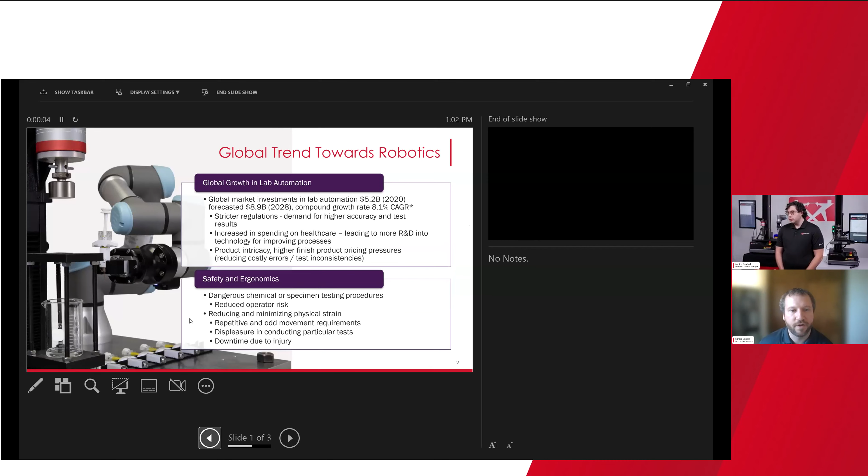Hi, thanks, Nick. There we go. All right, I'm going to start with more high level, just trends in automation. Oh, you'll just want to switch your slides. In there, thank you.

Perfect. All right, so automation in bio. So there's been a lot of global trends towards adding robotics into a lot of different industries, everything from manufacturing to testing. There's specifically been a lot of growth recently in lab automation. So automating the quality control, R&D testing that's needed to be done. Robots have worked their way out of traditional manufacturing environments and into the next stops along the way in the process for product development.

Global market investments in lab automation was $5.2 billion in 2020 and forecasted to grow up to almost $9 billion in 2028. So that's a CAGR of just over 8%. And what's driving this huge growth? 8% a year is a lot. Stricter regulations requiring a higher demand for higher accuracy and more test results.

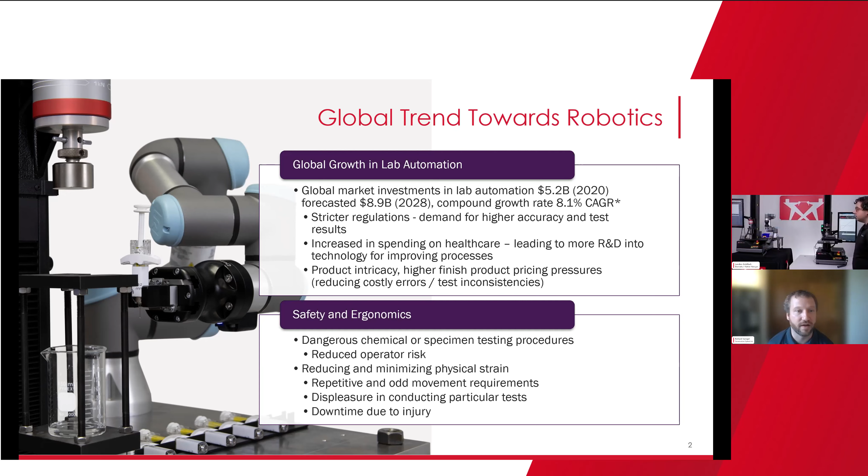Specifically in bio, I'm sure everyone's noticed, there's been an increase in spending on healthcare, leading to more R&D into technology for improving the processes. And companies are needing to increase the amount of testing they're doing, ideally without adding more personnel. So the product intricacies that are being developed now are having higher driving price pressures to drive prices down. And to do that, you got to lower the amount of money needed for testing. Safety and ergonomics. The safety requirements are constantly growing.

I know when I started in industry about 10 years ago, we used to be able to go and get a Band-Aid if we had a scratch or something. And that was that. You just needed to go get a Band-Aid. If I were to get a Band-Aid today, that's now an OSHA recordable. It's kind of the same injury, but the requirements are changing. So with that, trying to automate increases the safety by removing the risk from the operator. So dangerous chemicals or specimen testing procedures, reducing and minimizing physical strain.

Some lab equipment is not really designed around the ergonomics of the operator. It can be difficult to load in and unload, as well as just the repetition of the amount of testing needing to be done can lead to strain injuries. As well as there's just a general displeasure by some operators in some tests. Some are cumbersome or not fun to do, to sit in front of the test frame.

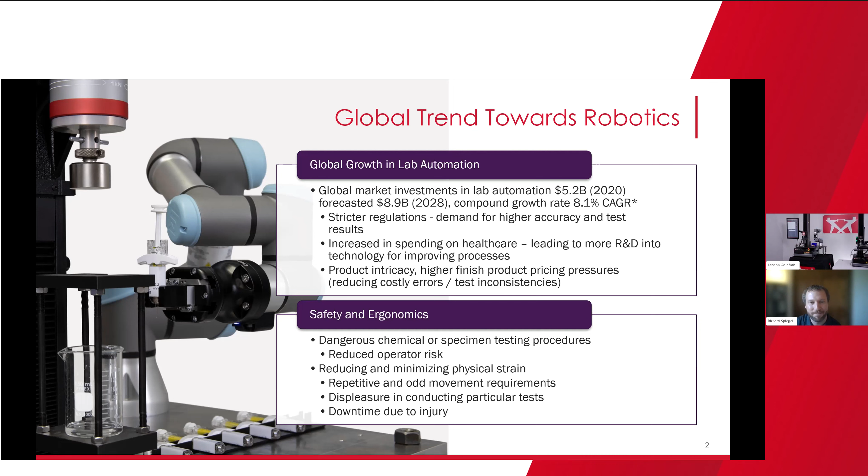So with that, why should companies be looking to automate? The manual processes in the test lab are very time consuming. You get hours spent by operators in front of these test machines, and humans aren't necessarily doing it the most efficient way. They learn how to do it one way, and it can be difficult to change.

Whereas robots, we're programming them to do it in the highest efficient way, minimizing movements. High volume samples can be processed easily without breaks or added supervision. You hit start and walk away. The training time is also significantly reduced. In general, it's much easier to train an operator on how to run automated equipment than how to run that same equipment manually. The learning curve is just lower.

With that, the cost effectiveness of automation really increases the productivity in the lab with a single capital investment, without adding further lab personnel. And with that, it can free up the lab personnel you do have for other more mindful tasks, things that require a human to do. Operators or lab technicians are also able to multitask. While one system is running, they can set up another automation system, having multiple frames running simultaneously.

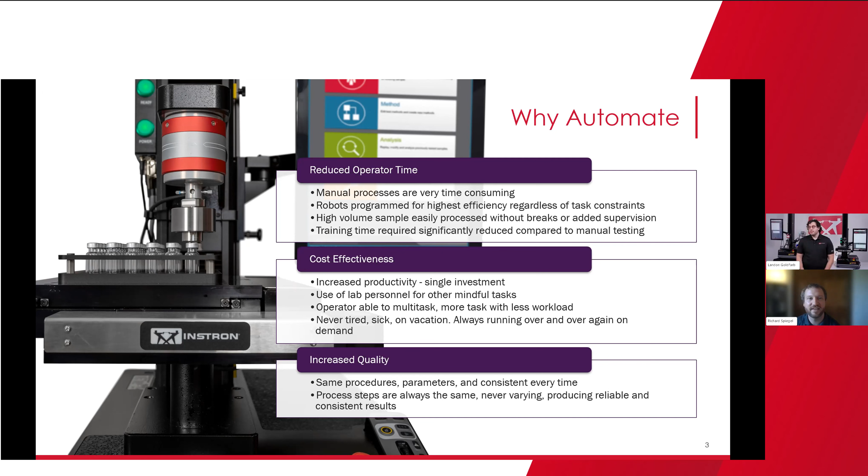Hi, everybody. I'm going to talk a little bit more about what automation could actually look like in your lab. I think Richard did a really good job talking about why companies are moving towards automation, what trends are pushing companies in that direction, and what benefits they can get out of it. But I think it's really important to see, because it's hard to sometimes visualize, what does automation actually look like in my lab? How will it work with my applications, with my specimens?

So today I have two systems here that really showcase some of the smaller scale applications of automation. I wanted to show these two, but it's important to note that the automation offering we have is not solely limited to these two styles of systems. We really have an entire platform of automation that can scale in terms of size and throughput, with whatever part of the product development process you are working on.

So smaller systems like these could have more of a home inside of a design verification lab or a center of excellence for testing. And as you move into more production style quality control environments, you can have larger scale systems designed to accommodate much larger capacities of specimens and much larger amounts of throughput for your testing.

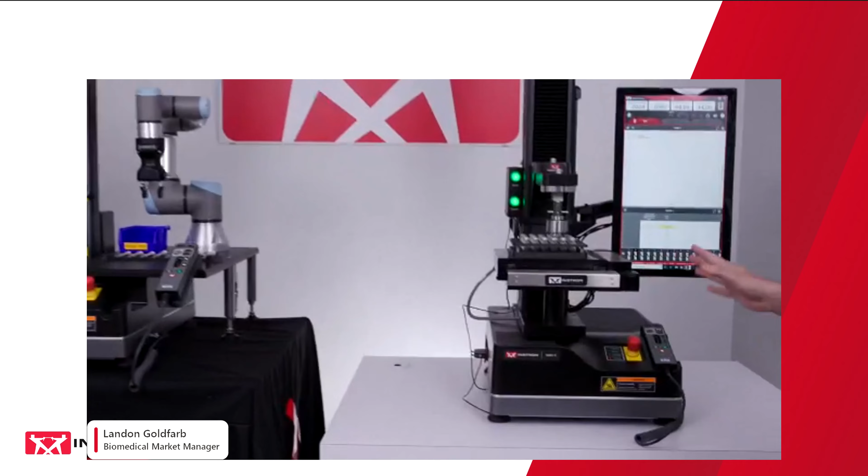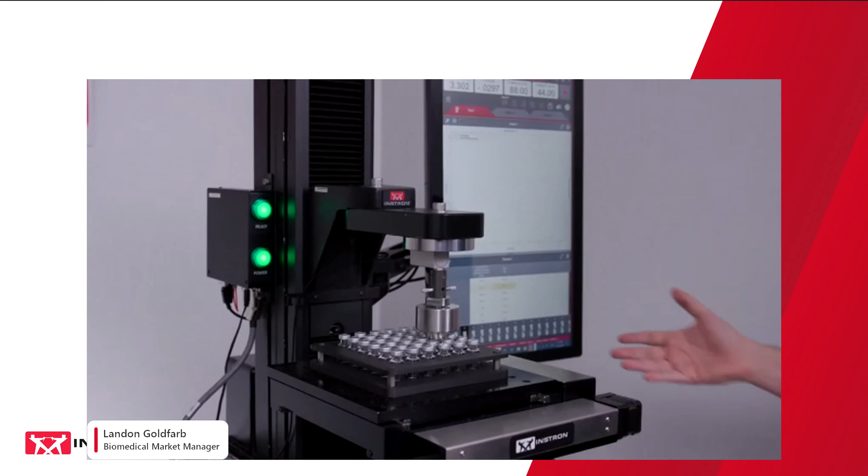So let's now talk about the two systems behind me. I'm sure you've seen the flurry of activity going on. We'll start talking about the XY Stage system, also known to Instron as an AT2. It goes with the family of automation systems, 2 meaning there are 2 degrees of freedom. We also have systems that are 3 degrees of freedom and 6 degrees of freedom, depending on the amount of throughput you're trying to achieve.

An XY Stage system is basically an automated stage that we can control to test arrays of specimens in a single test run. Here we're testing the residual seal force of a sample of vials. This is actually a relatively slow test, and when you think about the time required to take the specimen out, reseat it, and get the next test going, we've done some studies showing you can save 40-50% of your time moving away from a manual solution and more towards an AT2 style solution.

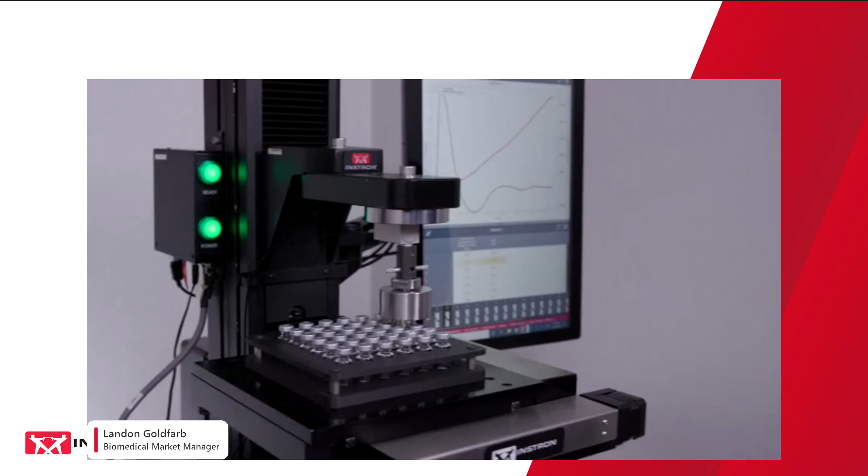In terms of what use cases there are for an XY Stage, obviously testing large arrays of simple compression style testing is one of them. But another one that crops up a lot, especially within bio, being such a component-heavy industry, is actually testing multiple parts of a product in a single test run.

I've actually had instances where a customer was testing an ablation probe, and they were testing with a bath on an XY Stage, testing multiple points along a piece of tissue. They wanted to understand at different points what force is required to use the probe on the specimen. So that's another helpful part of the XY Stage - you can use it to test multiple locations of a component very repeatably, time and time again. That's a really big part of it.

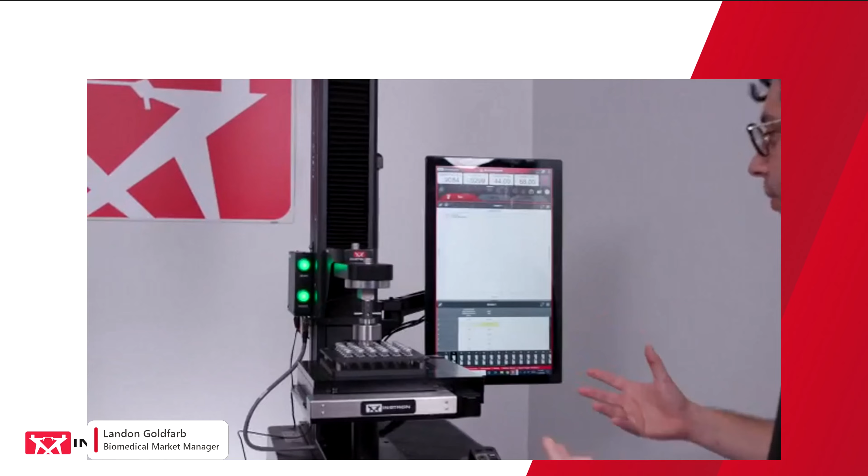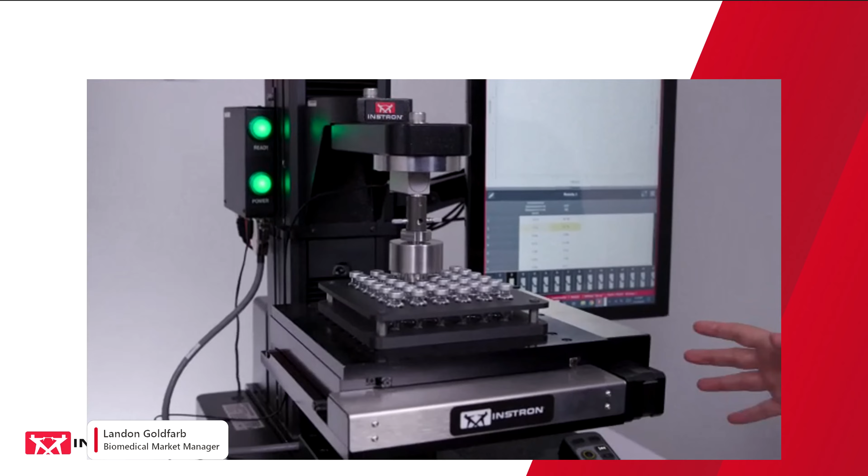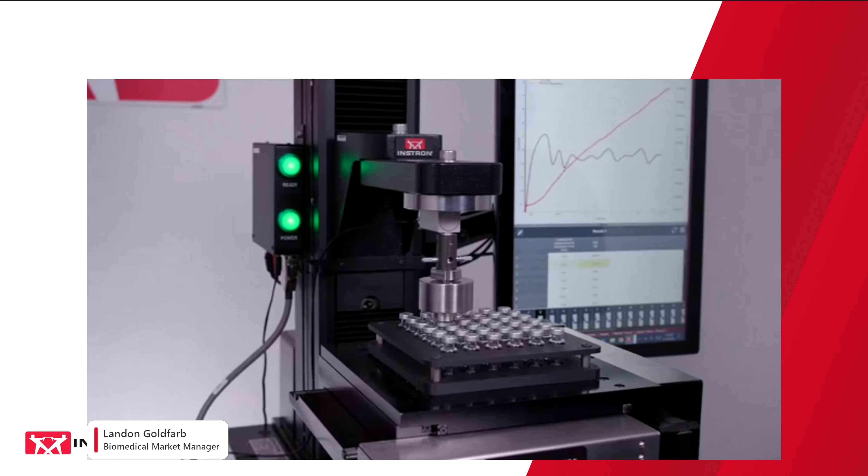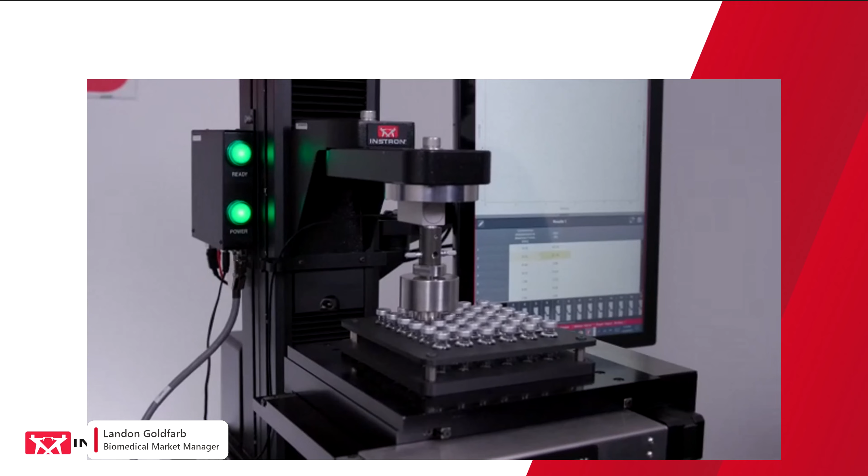One of the other really important things about using an XY Stage, and probably the question customers have all the time, is how does fixturing typically work? These stages have a mounting pattern attached to the top of it, and we as a company can provide all of the racking for your specific product. But if you're going to be testing a lot of different sizes of specimens, there's nothing stopping you from creating your own racking and swapping it out in between tests.

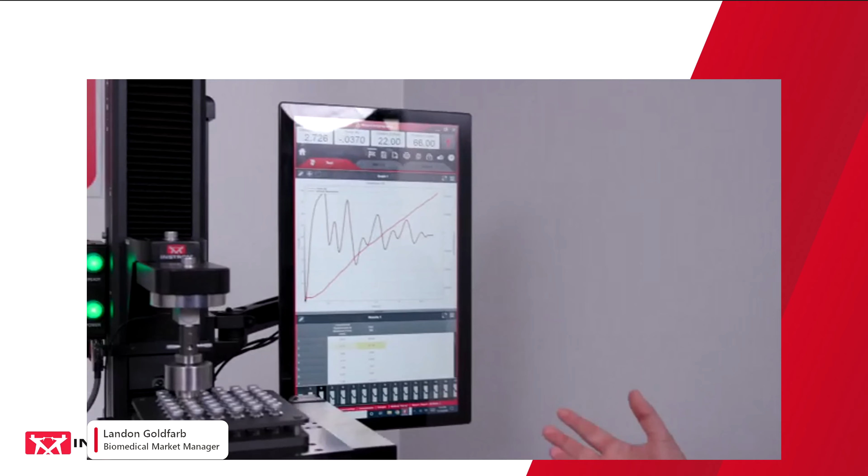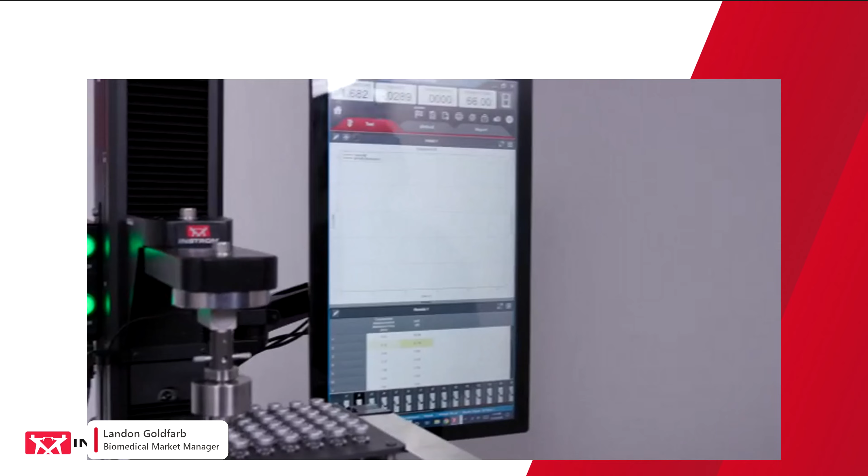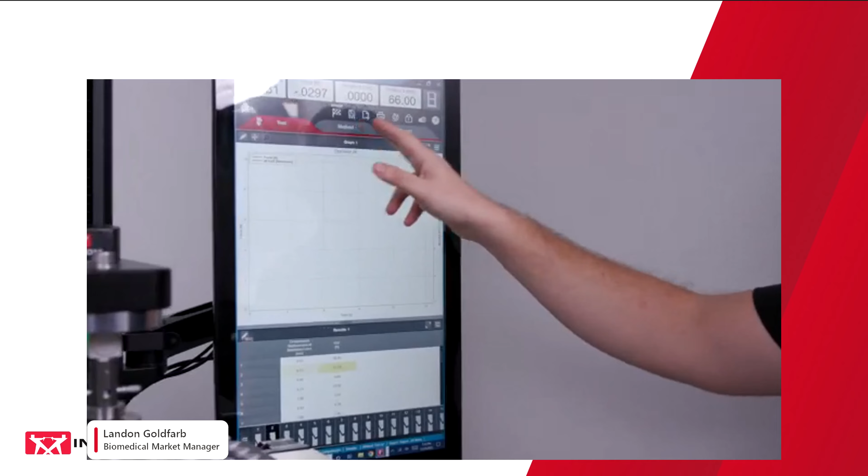In terms of how we actually control an XY Stage, especially if we're doing one of those more complicated movements where we need to test random locations on a component repeatably over and over again - I'm going to stop a test so we can look at the software. You can see on our live displays the position of the XY Stage in the X and Y axis. If you wanted to move the stage, all of that is done directly through the software. You have control to move it in any direction, move it to a zero point. There's also an optional joystick to improve the tactile feedback of how you can move it.

In terms of actually setting up a test, what that really looks like - when you're going into the method, you go to test control. How am I going to set up my test? The XY Stage is immediately built into the software, and you can set up different test sequences.

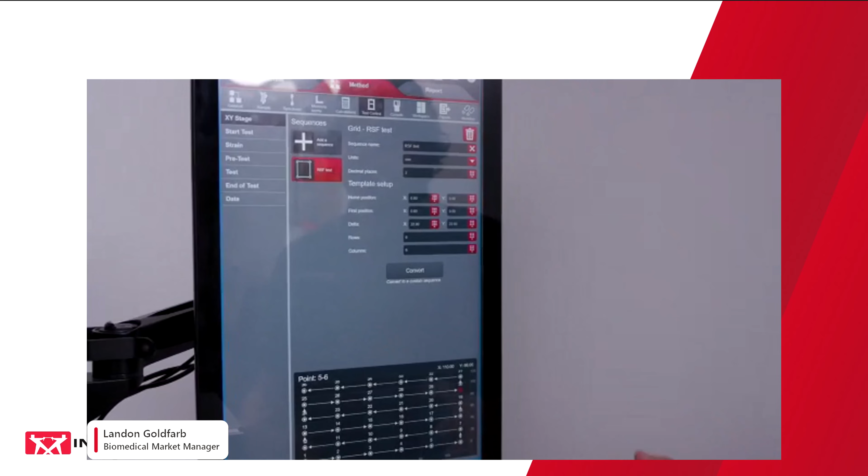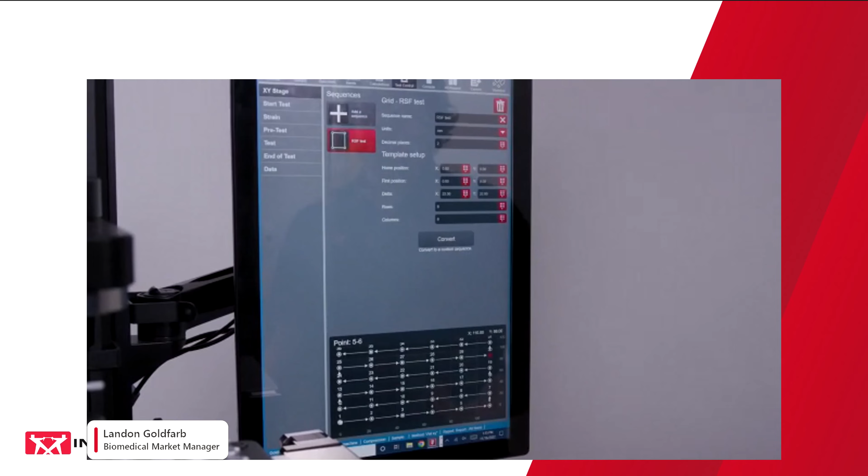So you can say, hey, I'm doing a grid and I know that my delta between each position is this amount. This is the number of rows, this is the number of columns, this is where I want to start. And that is all that is essentially required to create a test. Past that, you simply hit start and the software knows to run through each specimen in that grid in the order you have specified.

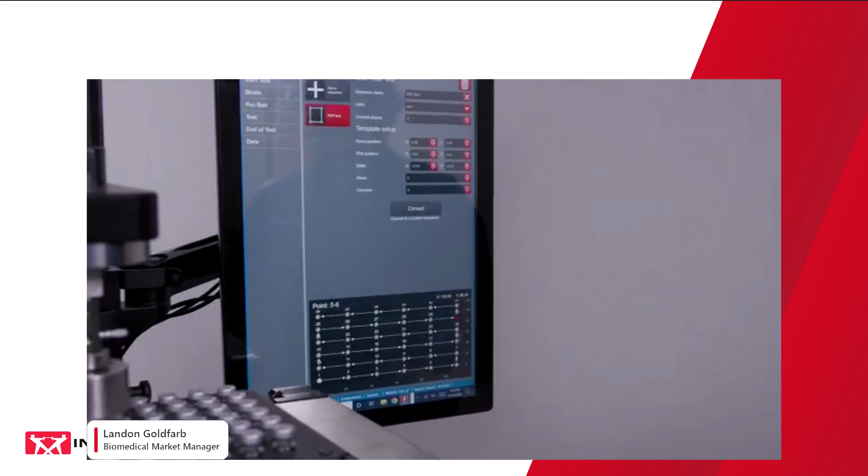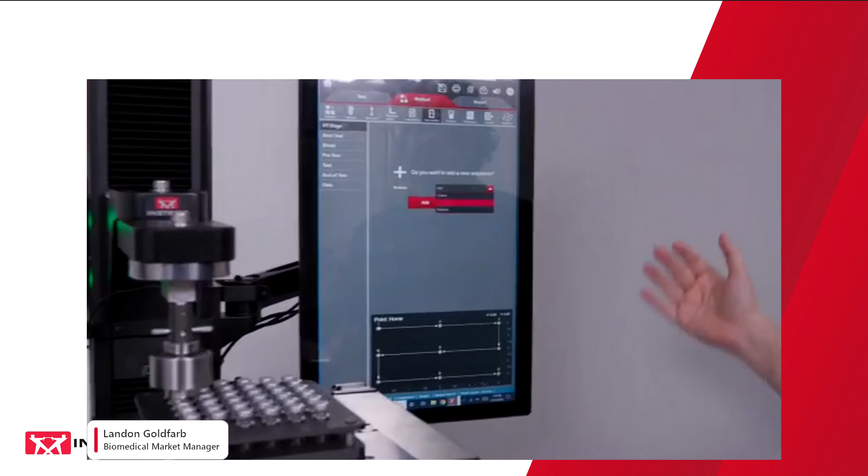In the case where, let's say, you were trying to test a component, you do have the ability to add different types of sequences. So you can do a diamond, you can do custom, or a grid. So if you do custom, you choose individual points that you want to run your test on.

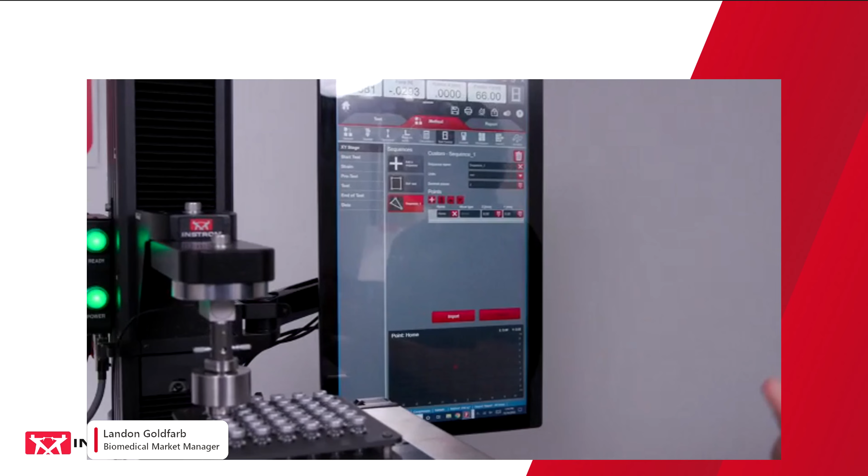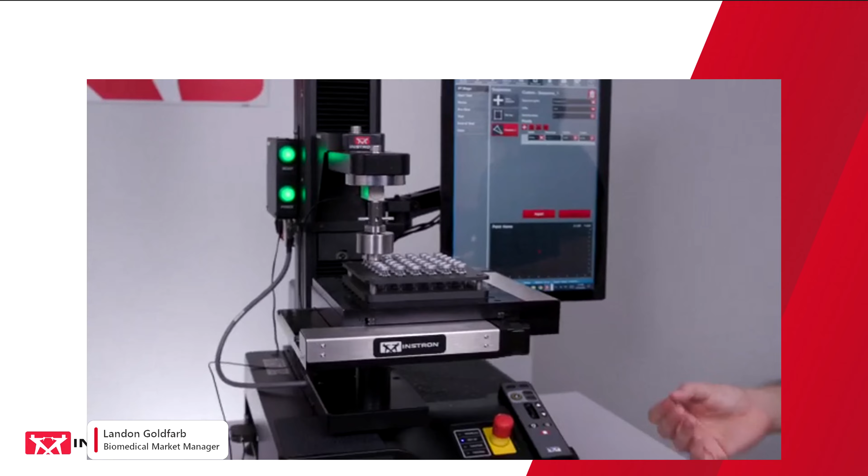And you actually have the ability to import those points in an Excel file and immediately populate the profile of the XY stage. And if you have a CAD model of the component you're testing, it's much easier to get those points in CAD, put the actual points into Excel, and then import it here, than to manually go through the process of moving the stage to each correct point.

So there's a lot of flexibility with how you use the XY stage, how you set it up and run a test. You can really get from having a component to starting to run a test in 5-10 minutes once you get used to the software and are comfortable running with it. So that is, I think, a pretty good overview of what the XY stage is.

We're going to move over to the Cobot setup, which I'm sure is the one that's a little bit more eye-catching. I'm sure a lot of people have seen this type of product, a Cobot, in other circumstances - it's in a lot of manufacturing processes. So basically, what is a Cobot, and what is the difference between a Cobot and an industrial robot? There's a lot of nomenclature out there, but what really is a Cobot?

So it stands for collaborative robot. And really the main difference is you can have it in an unguarded state when working in tandem with your system. With most, and pretty much all, industrial robots, safety requirements require guarding around the entire system, which if you are in a small lab can be a real detriment because you might not have the space to have a fully enclosed guarded system in your lab.

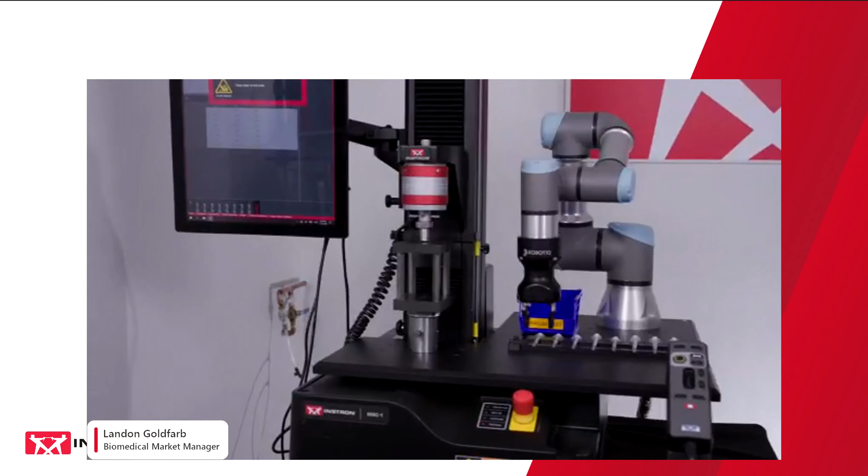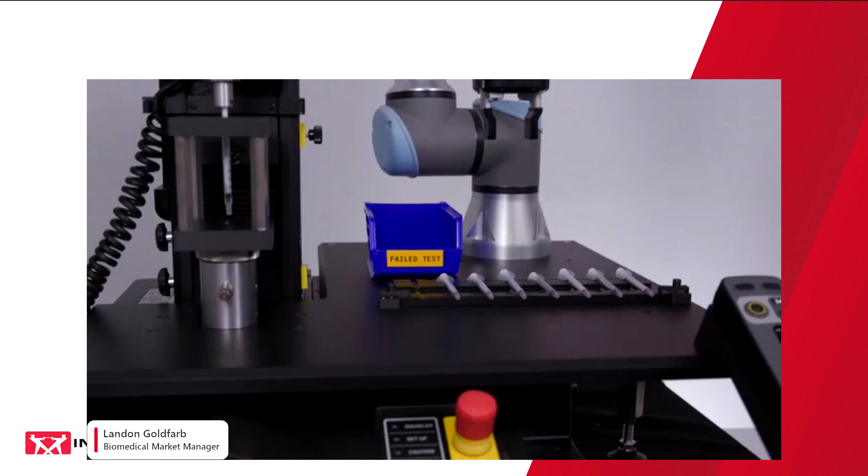So if you look at the plate that it's sitting on - this is really the most compact design that we could put together to have a Cobot and a frame work in tandem. And this is really coming from customers who are trying to fit automation into their existing lab space, onto their existing lab benches, where there can be real limitations in terms of space.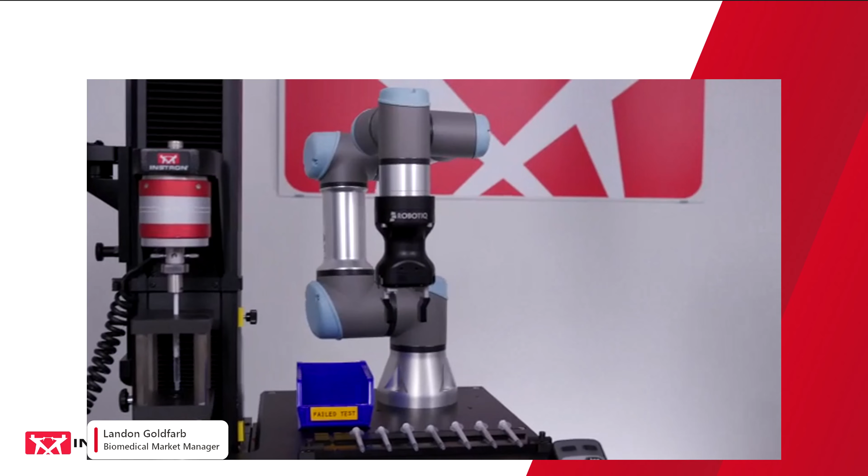So in this setup, you are only adding an additional 8 inches of width to the system, and that's it. Aside from that, it is the exact same footprint as a normal single column system.

One thing also, you'll see the racking—obviously this is a demo system, so this is more of an example of what the racking could look like to really achieve the gains in productivity that most people would want to. The racking would accommodate many more specimens. You could have multiple tiers of racking, so you could have 30, 40, 50 specimens.

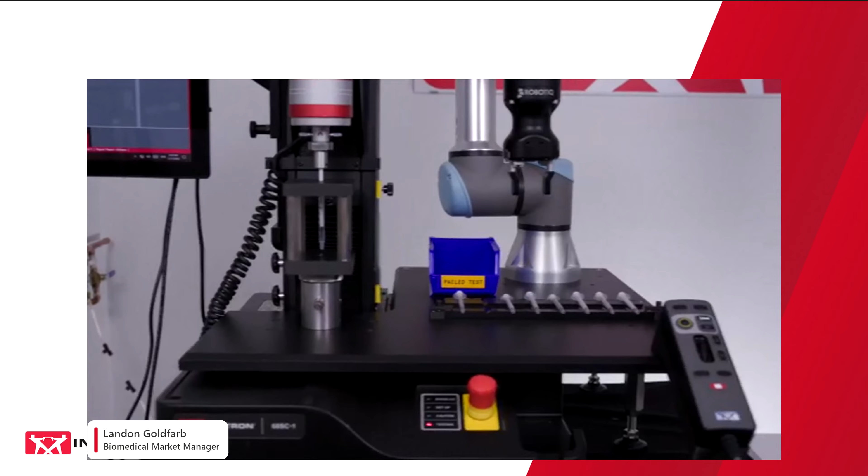And that's also not to say that you are beholden to this setup with this plate on the system. The one thing we always have to talk about with customers is there's always a trade-off between the amount of footprint that your system has and the capacity of the system. So if it was crucial that you had to test 100, 200 specimens, we could accommodate that.

The Cobot has the reach to handle additional racks. It will just require more room footprint-wise in your lab. So that's always something that we will want to talk to you about, understand really what are the requirements that are pushing you towards automation, because these systems really can accommodate a very wide range of applications and lab requirements.

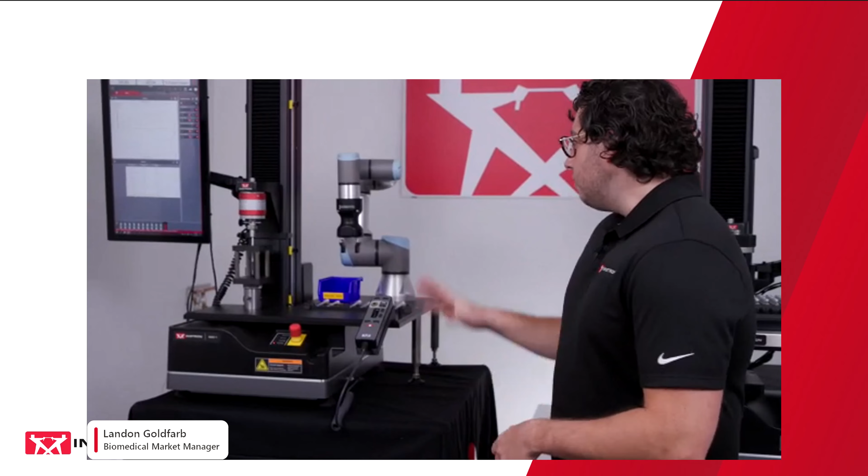So this test, we have a syringe that is being placed into the fixture, and we're doing a pull and push of the plunger of the syringe. So similar to a break loose glide force, but we're also doing the aspiration step of it as opposed to just depressing the plunger of the syringe. So a little bit different.

In terms of interacting with the Cobot, all of that is actually done through Bluehill. Bluehill is always in communication with the Cobot. It is telling it when you hit start in the software, it is telling the Cobot to start the program. You choose a program within Bluehill, and it automatically starts. You actually have the ability to choose multiple programs to be included within one method.

And basically, the use case of that is, you can actually see that there is a failed test bin on the stage. So if there was an instance where you wanted to put in specific pass-fail criteria to your test, you could tell the Cobot, if the conditions are X, put the specimen back into the racking system. And if the conditions are Y, put the specimen into this failed specimen bin. So you can understand and find the specimens that have failed and do a more in-depth failure analysis to understand why that could have occurred.

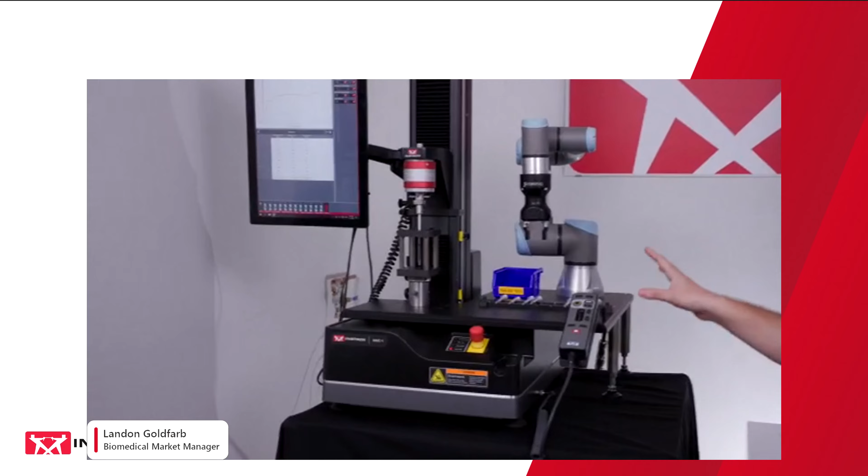And in terms of the usability of the system, it really is very much integrated with the frame. All of the controls are still through the frame controls. Start, stop, all of that is done the same way you would normally use a system today.

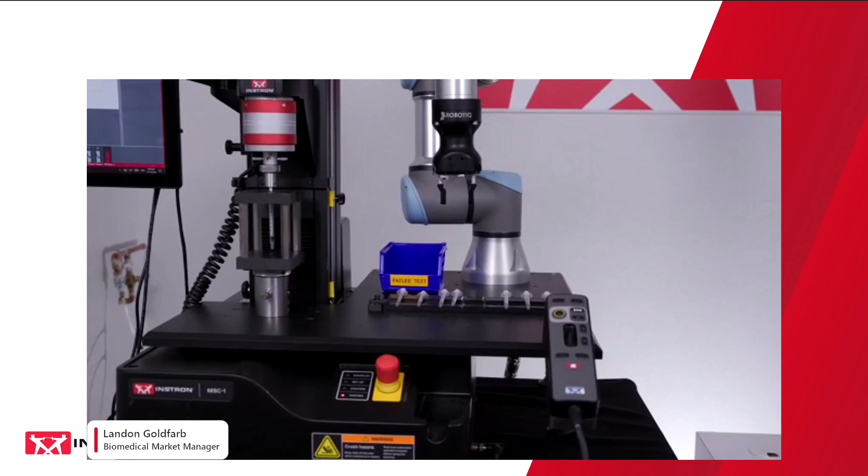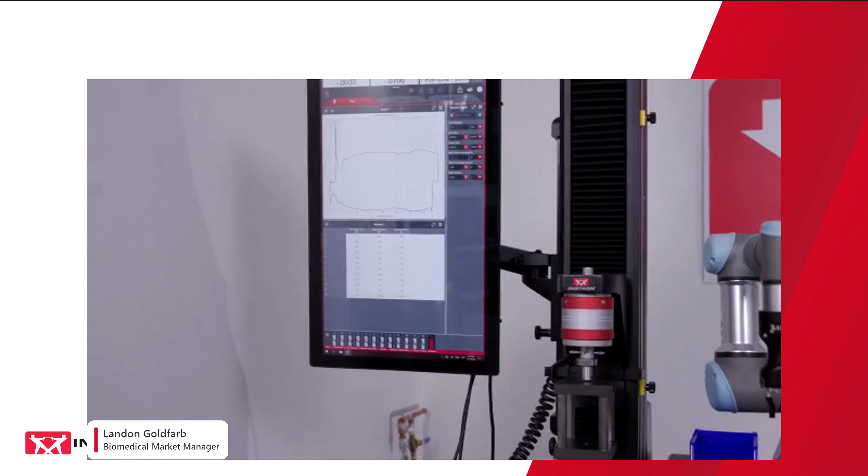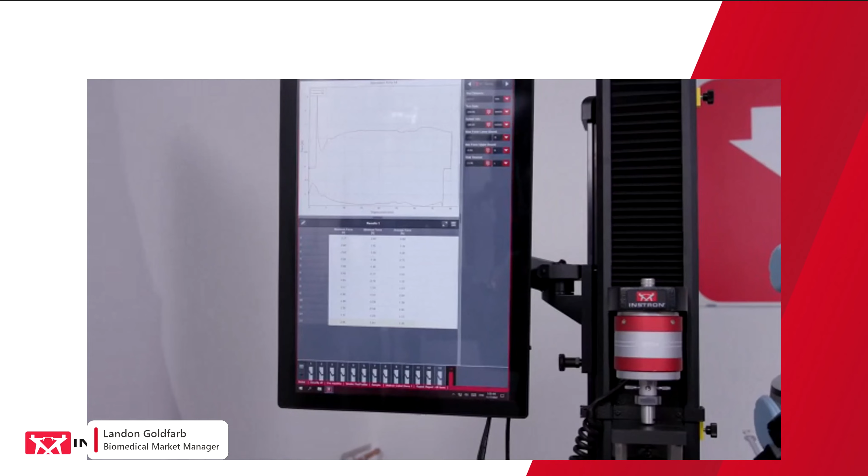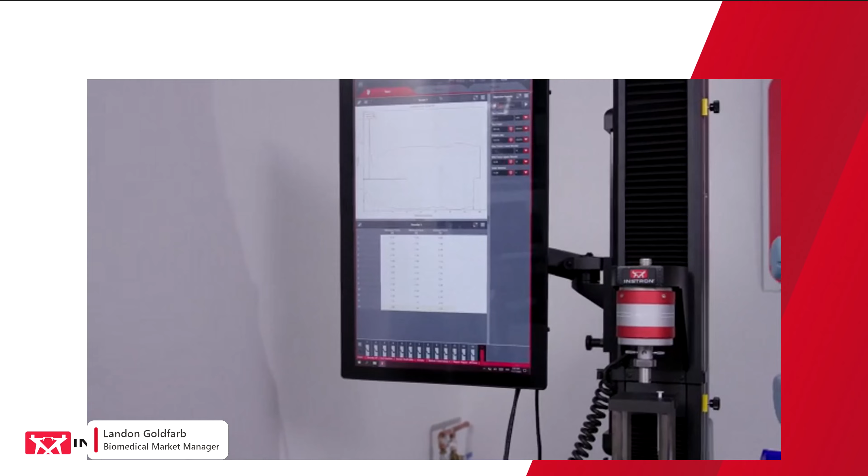And one thing, if you actually look at the software, you can notice we always have what's called the active zone, so you can see in text what the system is doing at all times. That's really useful when a Cobot is running especially—what is occurring with the Cobot, even if things do happen. In this case, the specimen did not make it into the fixture. But like I said, the active zone can always follow what the Cobot is doing and make it very clear to an operator how the test is being run.

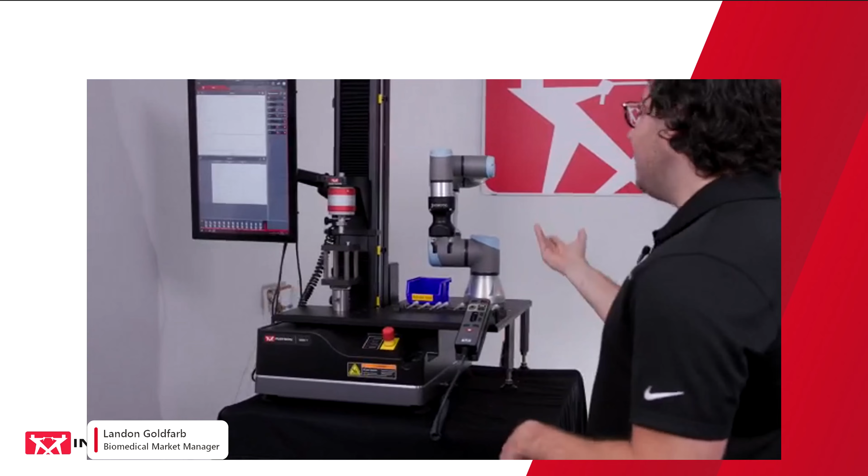In any case, this will probably be a good reason to see what would happen if a specimen failed. So this way you can still acknowledge that a specimen was not tested properly, and it'll put it into the failed bin.

So, there's a silver lining to it anyway.

So I think that really does show a good part of the usability of the Cobot, what it typically is used for. And I think one thing that I've started noticing a lot in dealing with customers and talking to people is that more and more there are positions that exist within companies that are people solely focused on trying to optimize all of their lab testing procedures—how can I get the most efficiency, the most productivity out of all of my lab processes. And I think that really is showing kind of the commitment that a lot of companies have to introducing automation and to trying to get as much productivity and efficiency out of their testing systems as possible.

One thing that's really important is that automation within bio, being such a fragmented market, there are so many different types of products, varied devices and specimens. There is no one-size-fits-all solution, even in automation. So we have a dedicated automation engineering team solely focused on working with your company to understand your specific requirements for this device, this component, how we can automate it, and how we can take as much operator interaction and opportunity for error out of your testing process as possible. That's a big part of Instron being a partner in the move towards automation. It's not just having solutions that can work for automation—it's working with your design and engineering teams to find the solution that works best with your existing processes and getting the best combined solution that benefits your lab.